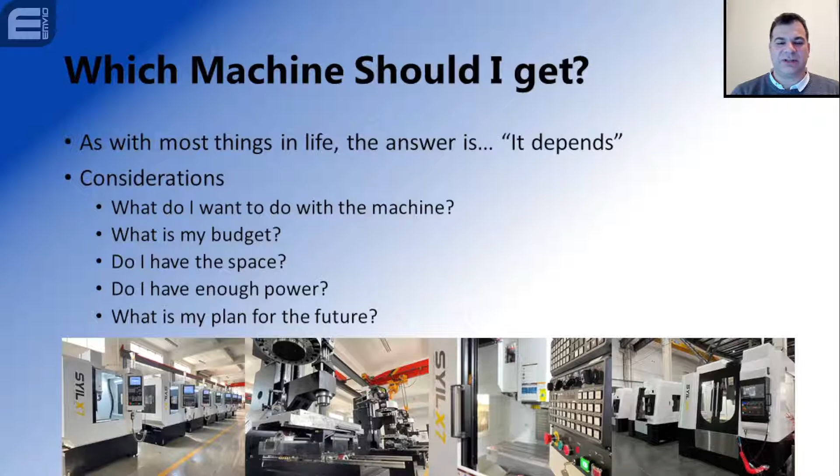The current range of machines, and this is something that will confuse some people that have been following SYIL for a while, is significantly smaller. Previously, we had the V series, we had the T series, we had the X series, the X5, the X7, and then a whole host of V machines, which are 850 millimeter X travels all the way up to 1700 millimeters X travel. But SYIL have consolidated, and they're focusing on quality and focusing on this particular range.

So we're starting off from left to right with the X5, which is a very compact machine, and it is not a replacement for the old X5. It's significantly more industrial. Then we're going into the X7, which has been around since 2020, and it is a very popular machine. It offers the best value for money and sits squarely against what other people would call a mini mill, or a super mini mill if you're of that persuasion.

The X9, we haven't seen much about that one yet because they're pushing the X5 and the X7. So later in the year, maybe summer, autumn time, we'll see that coming through. But finally, we've got the X11, and the X11 is a serious machine with quite a lot of travel, but very, very compact as well.

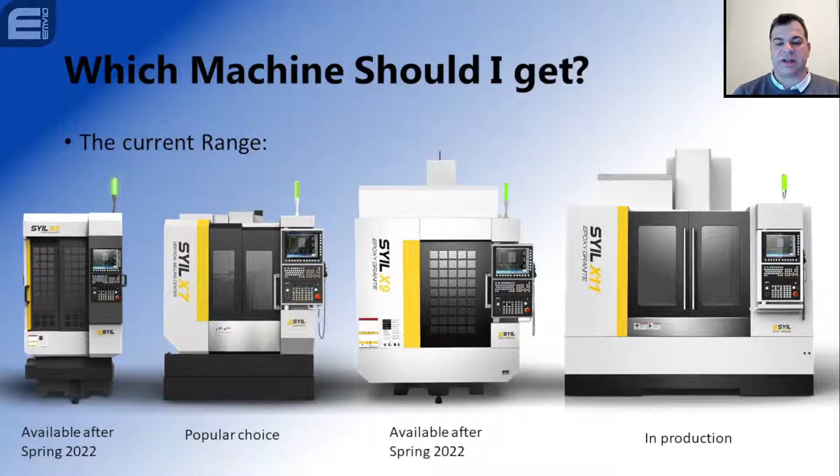Footprints. This is a slide that I wanted to give you a sort of visual footprint for each one of these. The X7, 1.5 meters by 1.8. So if you can imagine, you are on the bottom of the slide looking up, and that's where you will find your machines. You can see the X11 is 3 meters wide, so yes, it does take up a lot more space and also in depth, but the X5 has a different form factor.

It is deeper rather than long. So from left to right, you will see it's 1 meter long, and from front to back, it's 2.1 meters. The depth of the actual machine is much smaller, but we do have the case of having the coolant trays and the chip trays at the back of the machine, and that does affect the overall length.

So the footprint is just a footprint. What we also need to think about is how do we place this inside our factory. For example, you need at least 600 millimeters of space around the machine. On the front, you need as much as you can, as you need access to your controllers and you need to be able to move about.

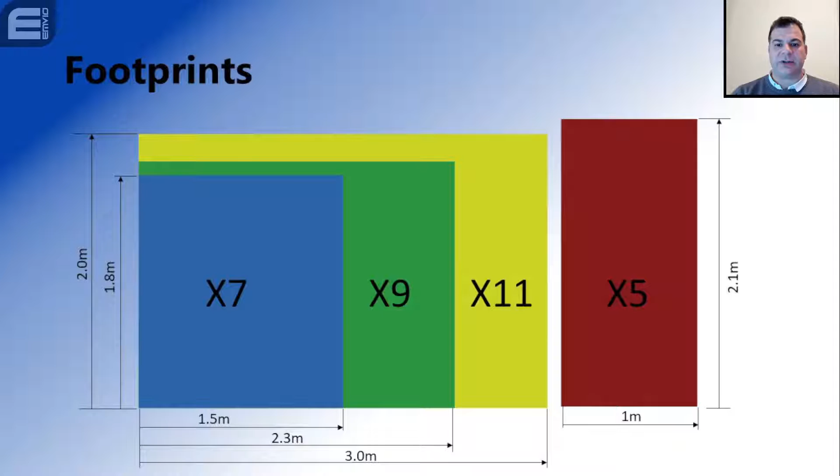Okay, so let's think about now, you've made your decision - how do we spec this machine? Start with power. Do you need a single phase machine? If yes, then we need to limit ourselves to the LNC controllers. LNC is one of the controller suites offered by SYIL, and it's the only one that can be made to take a 240 volt supply.

Can you get 3-phase? Is it easy to get 3-phase in your area? Some areas will have 3-phase generally available, especially if you're in an industrial unit, but it might take a bit more time to bring in a 3-phase supply using the electricity board. So for example, if you wanted to install a 3-phase supply in your house, this is something you really need to balance up against maybe getting a rotary phase converter.

Our machines do work with rotary phase converters, and this gives you a decently good 3-phase supply, but it will limit how much power you're able to get out of the machine. I would not recommend a rotary phase converter for machines larger than the X7, because then you need a much larger rotary phase converter and also a much larger single phase supply to feed it.

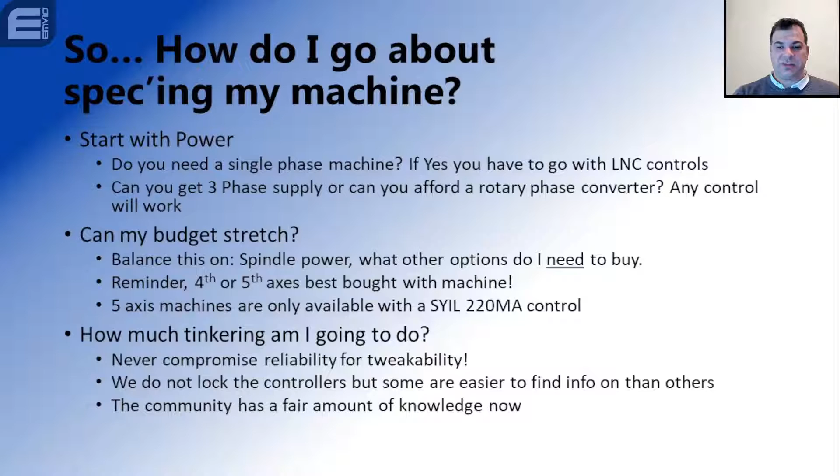So let's go into controller options, because this is the first hurdle that people come in and find. From left to right, I'm going in the direction of price increase. So the cheapest option, or the most value for money option, would be the LNC 6800. I have to admit, when we first started shipping these, I was not 100% convinced. I didn't know them, I hadn't come across them, they were small, they were Asian based, they did scare me. But over the years I've had customers that have fallen in love with them so much that they're getting their second machine based on the LNC.

One of my partners here in the UK is also producing specialist screens for those, so it's proven itself to me and to our customers, and we're very, very happy with them. It's got nothing to be jealous of compared to the other controllers. Second one up is a customized Syntec controller, customized to be a SYIL base. They've got their own front end and skin, much more improved than the original one. Syntec USA has also been working with SYIL through our friend on YouTube who goes under Nerdly, so Jason there. And they've produced a few screens, and made it much prettier. It is a very good controller from what I'm hearing. We haven't shipped any to the UK just yet, because most of my customers will go with the LNC, or in previous years they would go with Siemens. But I'm looking forward to getting one of these in the UK shortly.

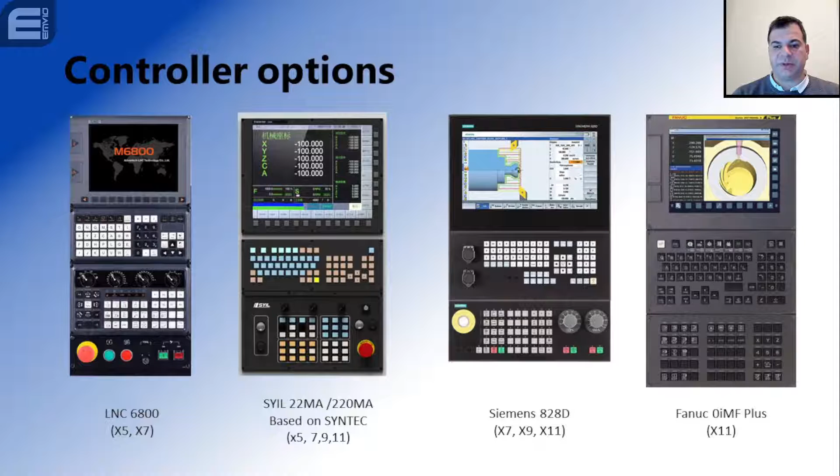The Siemens is an industry standard. It's got a lot of options inside already. You can get more options on top. I'm not currently 100% sure whether the machine ships with ShopMill, but I have the understanding that it does. I need to confirm, but ShopMill and some of the more advanced probing functions can also be bought from Siemens directly, and not for too much money, in fact. Let's look at them each at its own time.

Like I said, the LNC is very good value for money. It's fast, reliable, expandable. It can run up to 6 axes, but that is limited by the fact that it doesn't have the tool center point control, or RTCP as they call it. So you can't use full 5-axis capabilities. It's also missing the inverse time functionality, which is something multi-axis programming uses. It has been proven, and I think most of the machines shipped around the world come with the LNC, either 5800 or 6800. And of course it's the only option if you've got a single phase machine.

As with all of the controllers in the range, they are networkable. So there was quite a lot of discussion in the Facebook group on how you get the PC you're running, either Windows-based or Mac-based, to send files directly to it so you don't have to walk around with USB sticks. And we have discovered that you can also put a USB to Wi-Fi dongle and move that to the Wi-Fi, and then drag and drop files onto the machine.

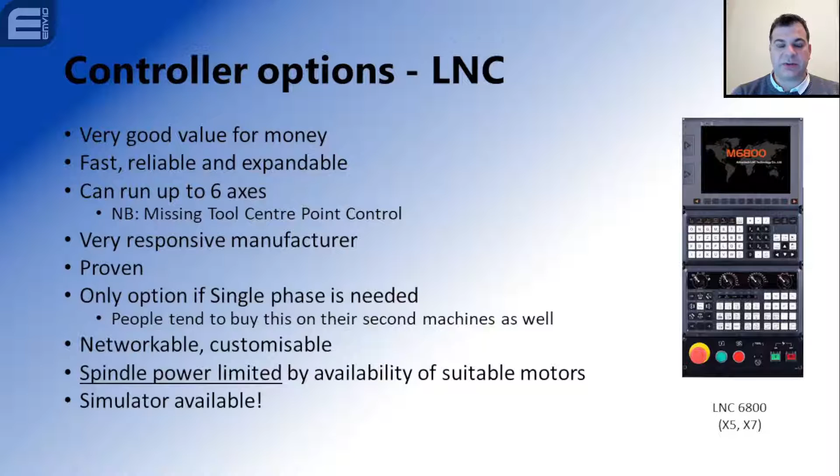There is also a simulator that works on a virtual machine. Incidentally, I have meetings with LNC going forward because we would like to have a lot more local support for LNC within Europe, starting with the UK.

The SYIL 22MA, or Syntec 22MA, however you've come across it, is a very capable controller. It's got functions that previous controllers like the Siemens 808 did not have, and it's cheaper than the 808, making it very good value for money. We've also seen quite a good response from Syntec USA and Syntec China regarding aftermarket questions, or questions that have come up during the warranty period.

Syntec USA in particular have also been happy to work with us, and I've had meetings and conversations with the team out in the USA to see how we can improve the workflow and also improve the user interface of the controller.

And it's the only controller that we do at this point in time that does true, and I'm talking about center point control 5-axis machining. This really puts some of the larger boys to shame that are 3+2 as opposed to full 5-axis.

There is a simulator available, and you can get in touch with me later on offline to get a copy of it. It is purely a 3-phase machine when you come with a Syntec.

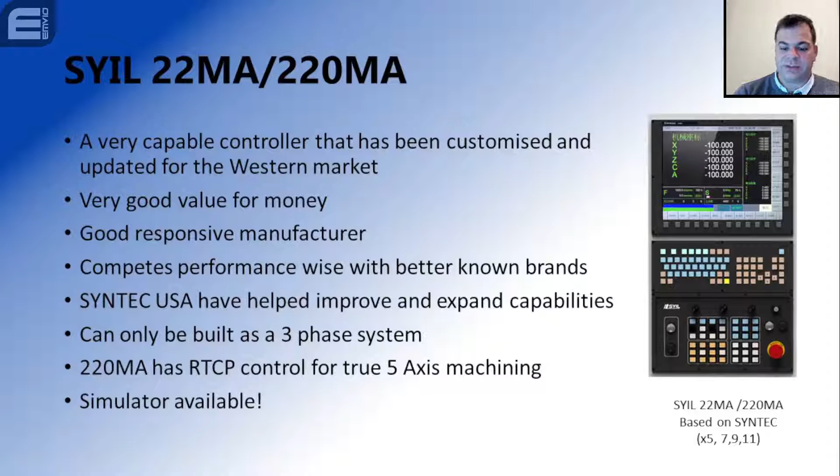I know that there's been good success running this particular build with a rotary phase converter, and you will be able to find quite a few YouTube videos on this.

Finally, the Siemens 828D is, like we said, the industry standard. It's very well documented, and it's expandable with multiple options that you can download or buy from Siemens directly. Things like Renishaw probes already exist and have been implemented with them for years.

However, where it really falls over, and this I can't stress enough, is the fact that through the pandemic, through the current crisis that the world is going through, the lead times have gotten atrocious. Siemens has been struggling to get the components to be able to build their controllers, and that has a very bad knock-on effect on the lead times.

So when somebody really wants a Siemens, then they really want a Siemens, and we will respect that and we will do it. But you do need to understand that there will be a longer lead time than, for example, the LNC or the SYIL 22MAs.

Again, they're Siemens, so they're a lot more money. You do need three-phase supply, and you can also get a Sinutrain simulator, which there's quite a lot of YouTube videos on.

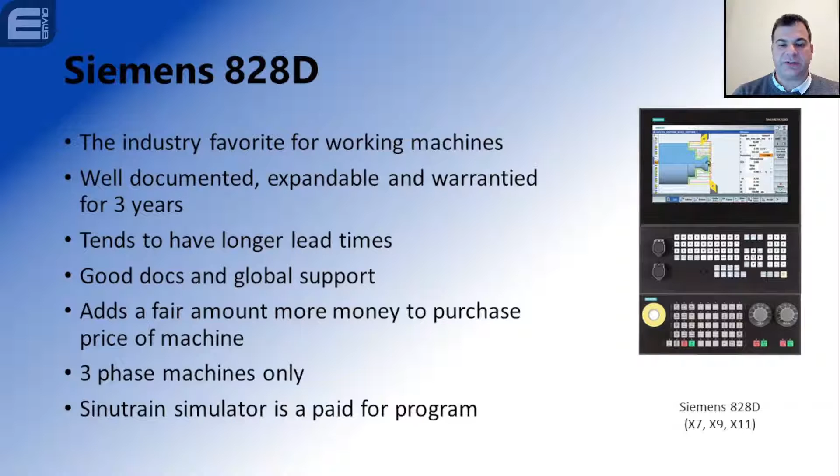Mr. CNC on YouTube is basically the mentor to follow, and of course there's a ton of other tutorials on how to make screens and so on.

Finally, the Fanuc. I don't have much to say really about the Fanuc. I don't know the Fanuc personally. Same league as the Siemens. Not seen a SYIL with a Fanuc for a few years now.

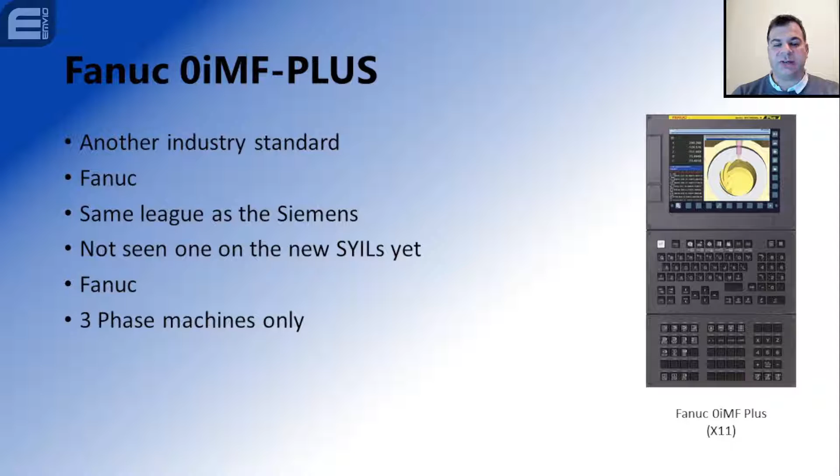Maybe we'll start seeing them with the X11 because they're going more into the industrial space. I'll wait to see those and learn how to use them as time progresses. Again, only three-phase machines and three-phase supplies are required for these.

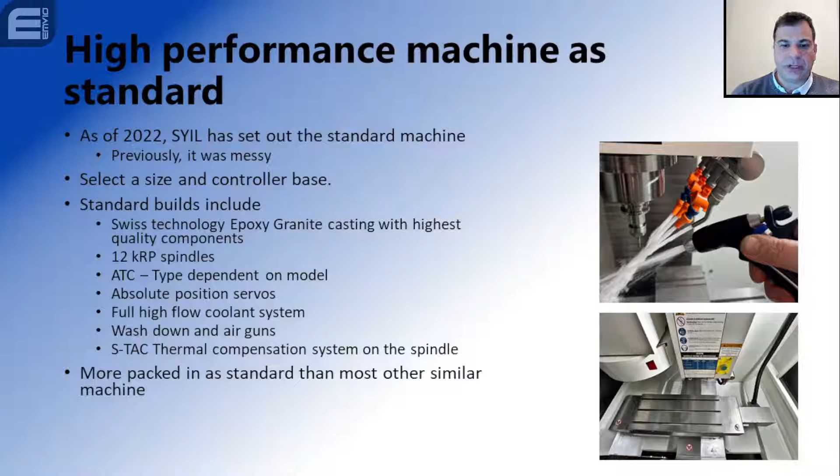Through spindle coolant is available on the larger machines, so the X9 and the X11. On the X7, it is only available with the 30,000 RPM spindle. In all cases, it's 20 bar plus pressure. So moving on - I'll come back to those points again later on.

From the standard machine, we also have the options, and it really is the options that make your machine yours. It makes our life a little bit more difficult when it comes down to building the machine. However, there are some things that are 100% worth getting with the machine itself. I don't see why anybody would want to get a machine without a tool length setter - it is, in my mind, one of the most valuable and least costly expansion options you can get. If you're struggling to finance the £750 or £850 that it costs, we can potentially look at other options for you. However, do get it with the machine as built, because then it'll be set up, calibrated, and ready to go.

We can upgrade the ATC on certain models. For example, on the X7, we can go from a 12 tool umbrella style to a 16 tool arm style ATC. Again, this is down to your particular preference and how many tools you expect to use. One other point is what kind of materials you're going to be cutting - if you're using plastics, I do recommend the 16 tool ATC, because it keeps the shanks of your BT30 holders clean, whereas the umbrella can get a bit messy.

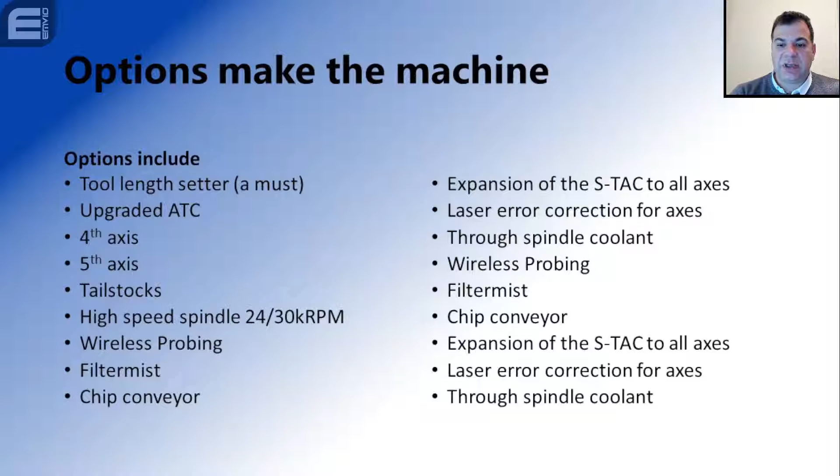Let's dive deeper into each one of these options as well. The probing, the standard tool length probe, actually will also do diameter.

So we've got the TTC 200, which is supplied by Pioneer. It's got a breakaway nose, so it doesn't damage the actual body of the probe if you were to slam your face mill into the side of it. It does tool length very, very well. Diameter, it does well if you calibrate it, in the sense, if you dial it in.

So you need to find the center of the target, the white target on the top of it. You can use the macros for that, but you need to also then rotate the target such that it is parallel to the bed as well as possible. And then it will also give you a decent diameter reading of your cutting tool.

Fully integrated into the GUI on the Siemens and on the SYNTEC as standard, not on the LNC. However, we do have extra screens for that. You need to contact my company Envio for those extra screens. All the macros for it are inside the controller already, but you can also use the graphical user interface to measure the lengths at least of each of your tools.

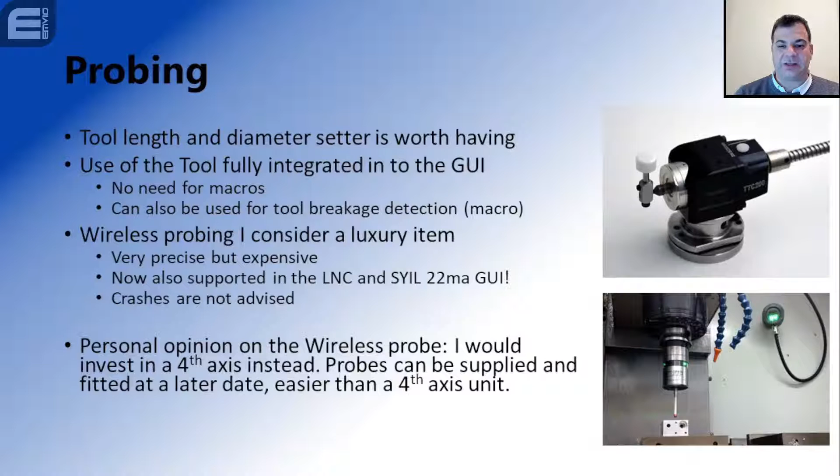Tool changers, another hot topic of discussion. Only the X7 allows you a choice. There you can either go with a cheaper 12 tool umbrella type tool changer or the 16 tool. There is a significant price difference. There is significant improvement in efficiency with those 4 tools, and the time from chip to chip for the arm type is significantly faster.

Added bonus for your 16 tool is that unlike the 12 tool ATC, where we have to have the coolant hoses on the right hand side of the head, we also have a nice coolant ring arrangement, so you can point the nozzles all around the head, as you can see in that photograph underneath my webcam stream.

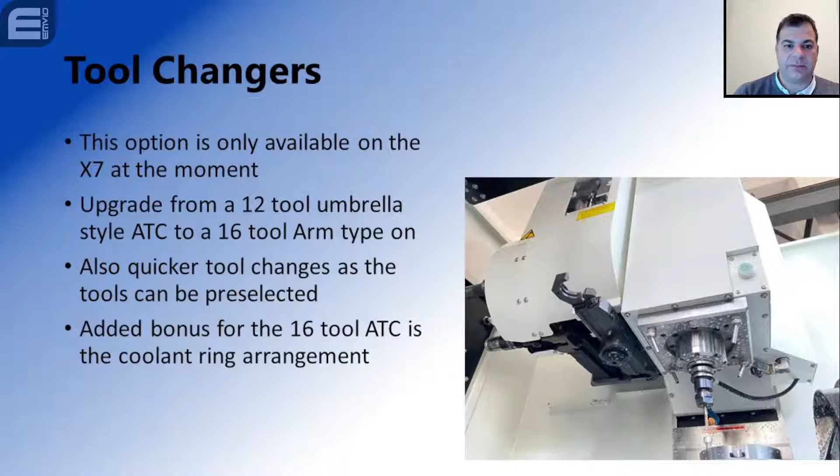There's a huge cost in the tooling, so bear that in mind. For example, BT30 spindle tooling are about $25 a pop, 17 pounds in the UK, sometimes under offer. The HSK stuff can be 3-4 times whatever they are. So bear that in mind when you're making the decision. If you need to make very fine stuff and you know that the machine you're buying is specifically made for the fine stuff, then by all means let's start discussing it.

This also opens up the possibility of through spindle coolant, and we do have machines out there currently, X7s with through spindle coolant, and it is very, very impressive, I have to say. At 20 bar, it can run angle heads, it can run all sorts of accessories as well, and the coolant system that comes with it is also very intelligent.

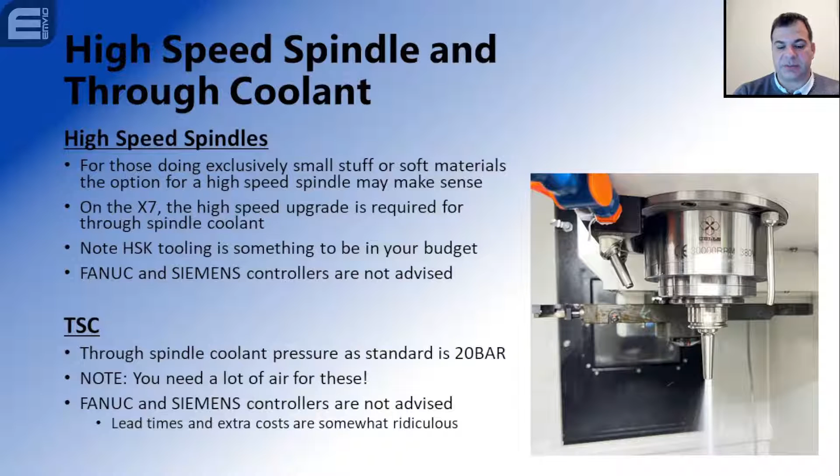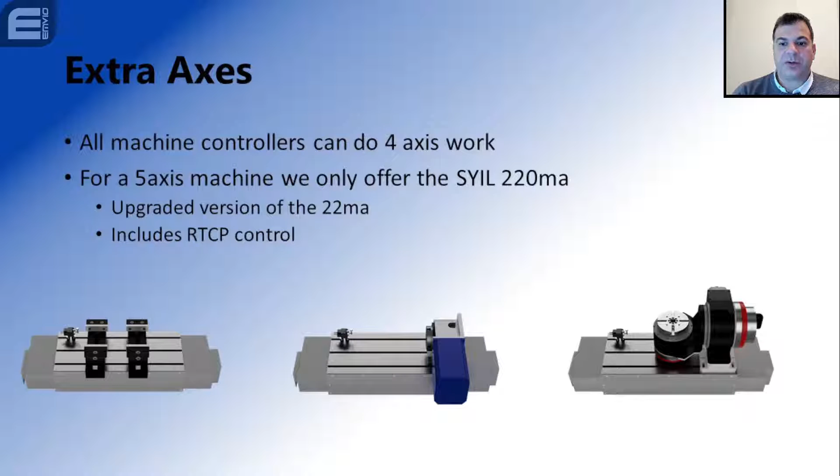Can I ask for customizations? You can ask. When we talk about customizations, we mean anything from additional I/O boards in the back, to electrical cabinets on wheels, to a different spindle, to a different tool setter. We will try to work with you on all of these things, but please don't be offended if we say we can't do it, or can't guarantee results if you ask for something non-standard. We will try, evaluate, and come back to you.

It's also very dependent on location. For example, you can ask for customizations for the Syntec controllers in the USA - they might charge you for the ability to do that, but maybe they can help. If you're in the UK, or anywhere else in the world and need stuff for the LNC, do ask us. We've got very good partners who know a lot about the LNC, and we're trying to get Emvio to work more closely with LNC.

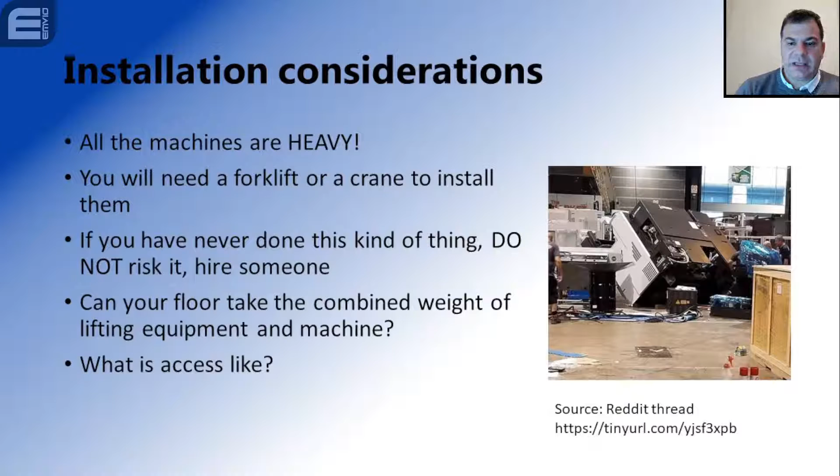The factory had done us the favor of putting the electrical cabinet on wheels, and then I spent a day and a half disassembling it so that we could put every piece of sheet metal on the pallet, put it through the window of the first floor - ground to first floor - and then reassemble everything, test and calibrate, and make sure that everything was working perfectly, because this is a company that does very precise crystal work, and I needed to make sure that their machine was accurate to within the specification. It is a paid for service.

So if we're struggling with the access, if you're struggling to go through the doors, then let's see if we can get a smaller machine for yourself. So if you're struggling with the X7, can we get an X5 in there?

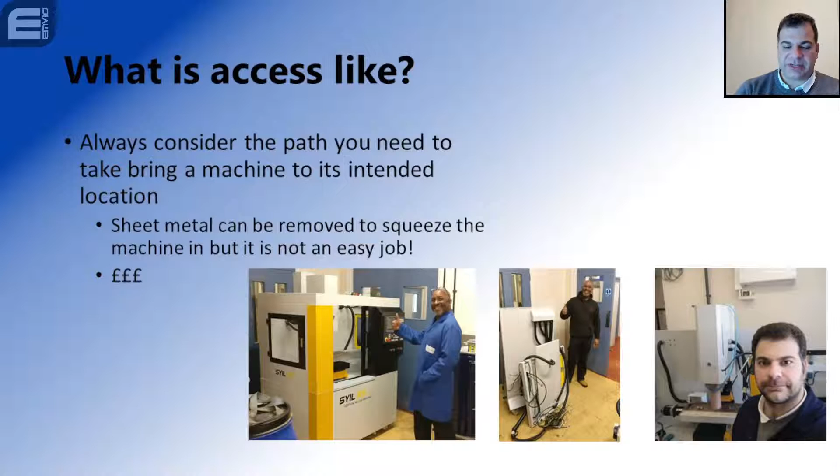What about commissioning? Okay, so you've bought the machine, it's arrived, you put it down. What do you do then? How do you connect all the services? How do you connect the electrics and so on?

I'm working on checklists because we're not getting these from the factory as quickly as we wanted to, but there is a lot of information that's just a bit sparse on the website, that is support.syil.com.

Most customers, to save money, or if they're in a remote location, or in locations where there isn't a local representative, will commission the machines themselves. And it's not difficult. The machine is not sent to you in boxes like some other machines you see around, where the customer spends a week trying to take the twist out of the bed. No, all of the machines are fully assembled when they arrive.

And this is why I'm saying that it should turn up, and with minimum effort, you should be producing components.

We can commission the machine for you for a fee anywhere in the UK, and also in any European country that is not currently being invaded. You do need to cover the fees plus the overnight and travel costs. Typically 1 to 2 days on site by one of our representatives, either myself or somebody else, and we'll also offer you user training.

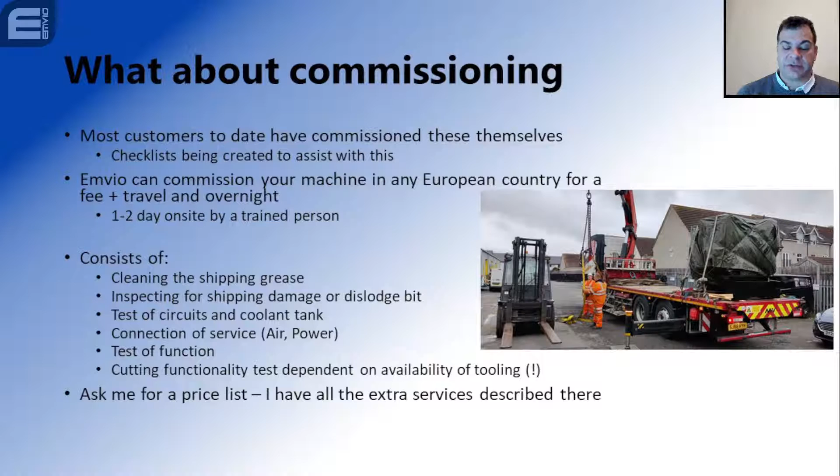Okay, so what other bits do you need to start cutting? We talked about the work and tool holding. A good vise is mandatory. It doesn't need to be very expensive, but at least it needs to be something that doesn't bow out, so as you put the two jaws together, it doesn't flip open. The jaws are preferably replaceable so you can put soft jaws. A lot of people use soft jaws to do two-sided work.

You will need a decent clamping kit. You do not need to spend a lot of money on it, but make sure it's got the right sizes for you. So for the X7, for example, you need to use the 14mm wide T-nuts. Get a ton of T-nuts. You cannot have enough T-nuts. They're cheap to buy on their own, and in the worst case, when it comes down to studs and nuts, you can just use a piece of threaded bar and cut it to length.

If you're a bit more posh and you've got some money and want to do multiple operations or multiple setups, start thinking about 0-point systems. In the next few months, I will be bringing out a set of 0-point system base plates that should be compatible with more commonly used ones, starting out with manually operated ones, but potentially going down the route of pneumatic ones.

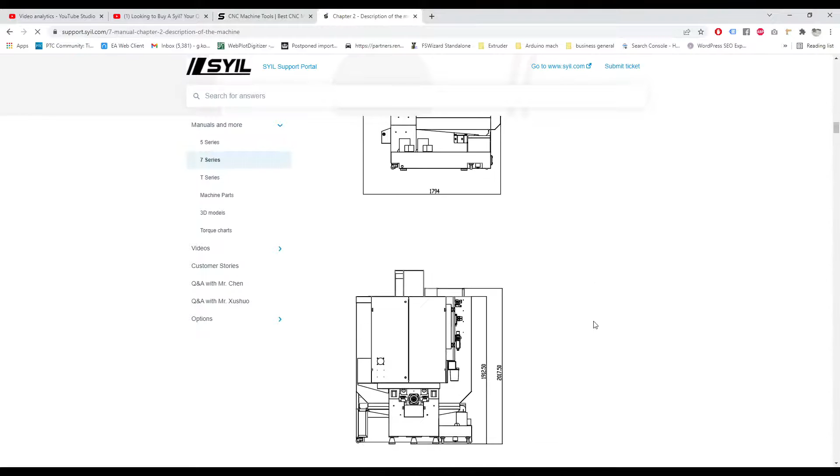In here you'll start getting information on how the machine looks, typical manual stuff. What you will not necessarily get is how to actually use the controller, and for that you need to look into the controller manuals - each controller is slightly different. If you need operation assistance, give us a call. A lot of people are putting stuff on the web and on YouTube about how to use those.

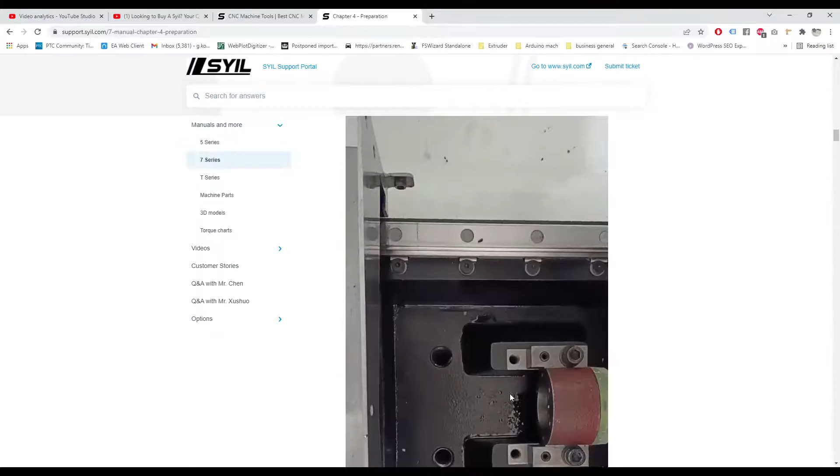We can also offer training on site, like I said. All of the information we're going to be needing - for completeness, lifting instructions, and stuff like that - will all be available on this page. Preparation information, not 100% perfect, but a lot of what you'll need for operation, for example the lifting instructions, is here, and I've also created a set of instructions showing how to use a forklift. The commissioning checklist will also come into here as well. Hopefully I'll be able to create another video for you guys commissioning the X7, and from there we'll get my marketing people to create a set of articles on that too.

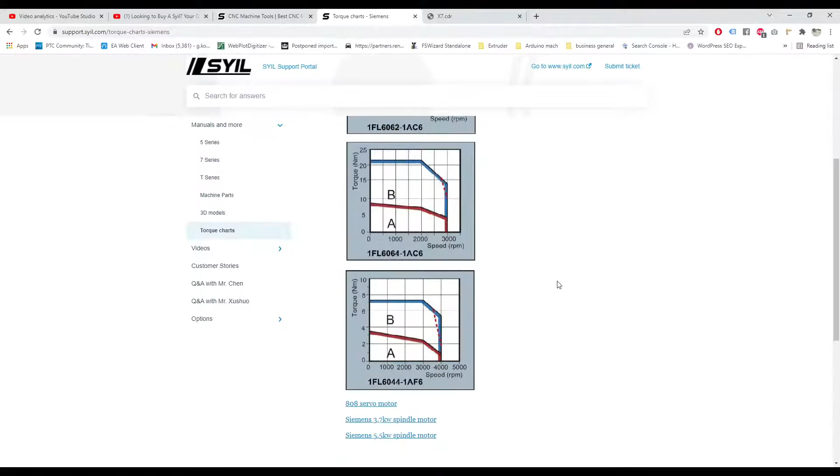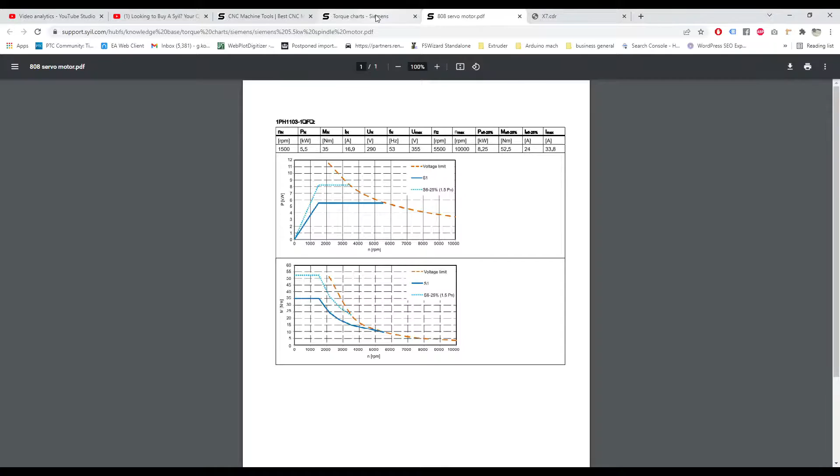What you can find, however, since we've been asked that question quite a lot, is if we go into the manuals and more, down at the bottom you'll start seeing the torque charts. So we've got the torque charts for the Siemens, giving you the ones for the Siemens 5.5 kilowatt spindle motor - you can see it there.

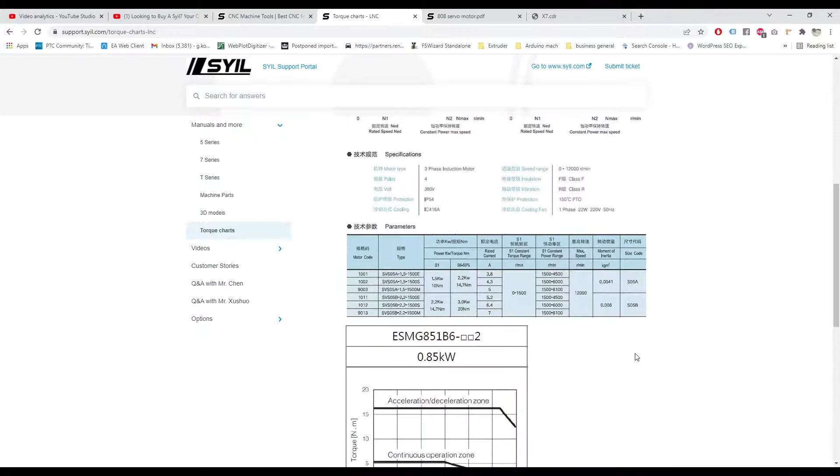We also have that for the LNC and the Syntec. I know we did it for the LNC because recently one of my customers who swapped out his Haas for a SYIL requested that, and we uploaded that in there as well. And let's see the Syntec - there you go. So this is for your axis motor as well as your spindle motors.

I have a question for the group. With the machine we're looking at, for example the X7, is it a big problem for you guys to be working with a BT30? Is it a big problem for you guys to be working with, let's say, a 5.5 kilowatt max spindle?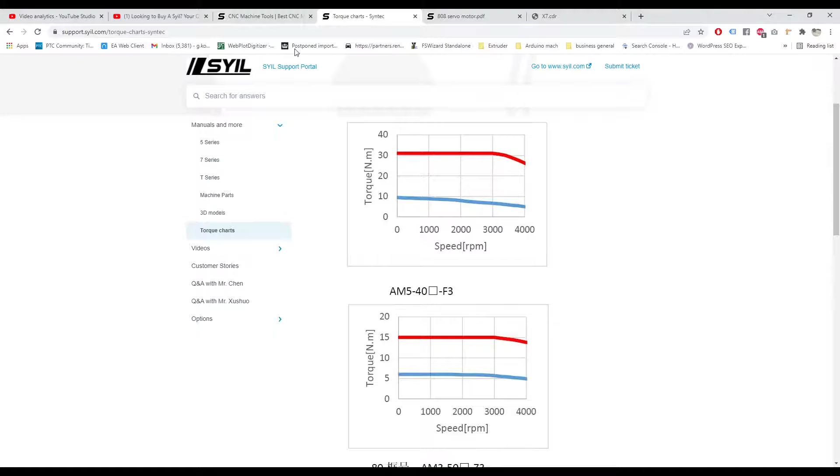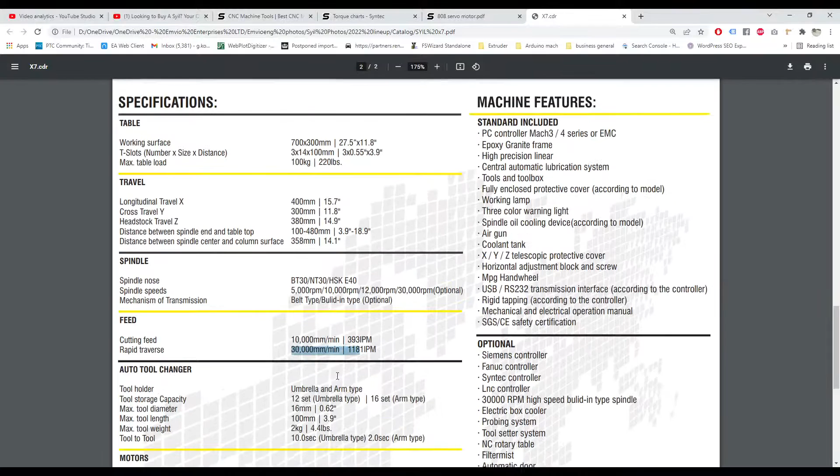Because the beauty of the SYIL offering is that the rapids and feed rates are massive. We're talking, on the X7, rapids of up to 30,000 millimeters per minute - so yeah, 30 meters per minute. It's ridiculously fast, actually quite scary to see the Z-axis going up at those speeds. And the cutting feed rate, within the rated torque of the servo motors on the axes, we still are quite fast. So maybe you could take lighter cuts at a higher spindle speed.

8,000 RPM is roughly where the 12,000 RPM spindles excel, and then you can take lighter cuts but go much faster. You can also do a lot more adaptive stuff to take that into consideration. So heavy cuts where you're face milling deep may not be the strong point of the SYIL X7 and X5, but we're not limiting ourselves because we can run significantly faster. Now accuracy also comes into it - is it really so much of a problem if we don't have an 11 kilowatt spindle motor like some of the competition does?

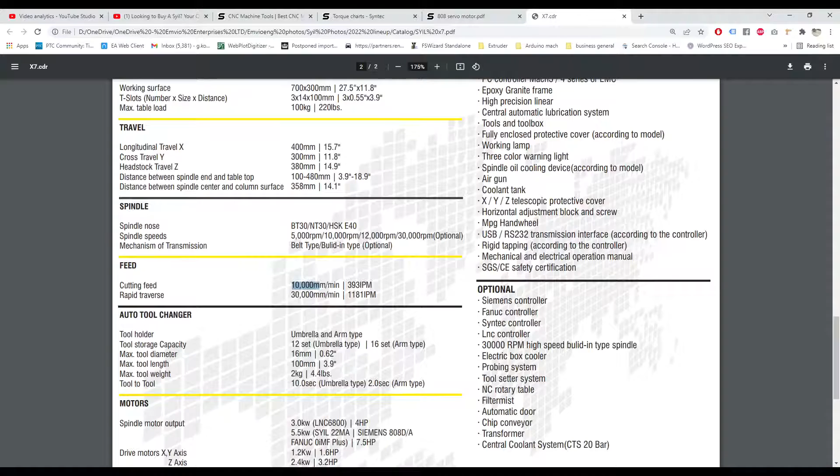While we're waiting for more questions, let me have a look at the height of the X9 and the X11, which was the conversation we had previously.

I'll go back into the brochures. The quoted height on the X9 is 2.65 on the height. I'll need to double check this because we haven't actually built an X9 - we've got the castings being produced at the moment, but the actual final figure might deviate slightly from the model figure. We'll need to come back for that when I've got more information.

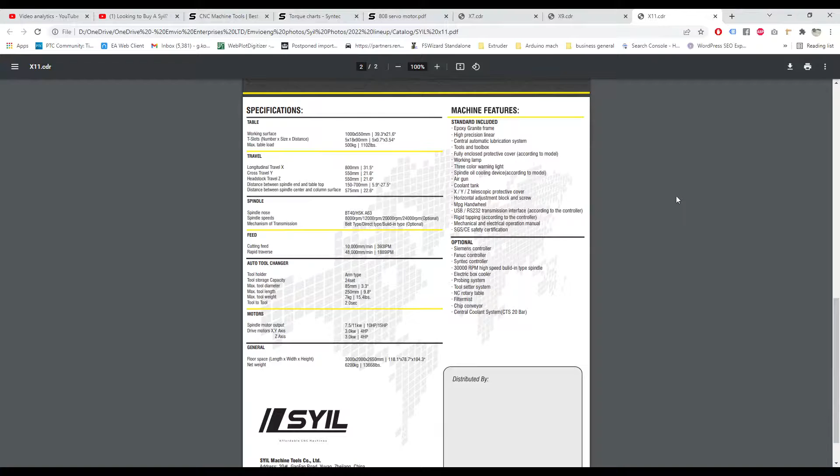And the X11, that one's about the same height. The good thing with the X11 is that most of the space is actually taken out lower down, so we've got a very nice large base, and there's no cable chain like the X7 extending past the top of the head. And it's got a lovely longitudinal travel of 800 millimeters, so that will put it definitely in the industrial size.

I'm sorry to hear that, Chauvelin.

Think of the future. You might put the machine in your garage now, but maybe later you'll want to get into a unit. What is it that you want the machine to do? That's really where we start. Is it a startup business, or a hobby? However we look at it, it's a very expensive machine for a hobby, the X7. There is potential for it to become a money earner, and we have lots of people around the world earning a ton of money with them. Some are surprised that even the cast iron machines produce the quality of work they do. So the ability of the machine is there.